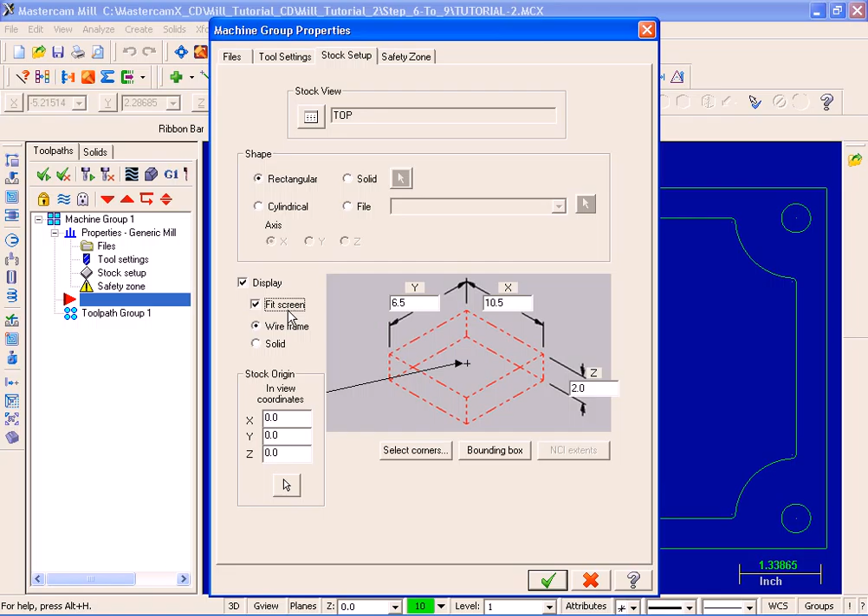Next, moving up to the top, I'm going to select the Tool Settings tab. Our feed calculation is going to be taken from Tool. If we move over to the right in the toolpath configuration area, I'm going to switch on assign tool numbers sequentially and also check mark warn of duplicate tool numbers.

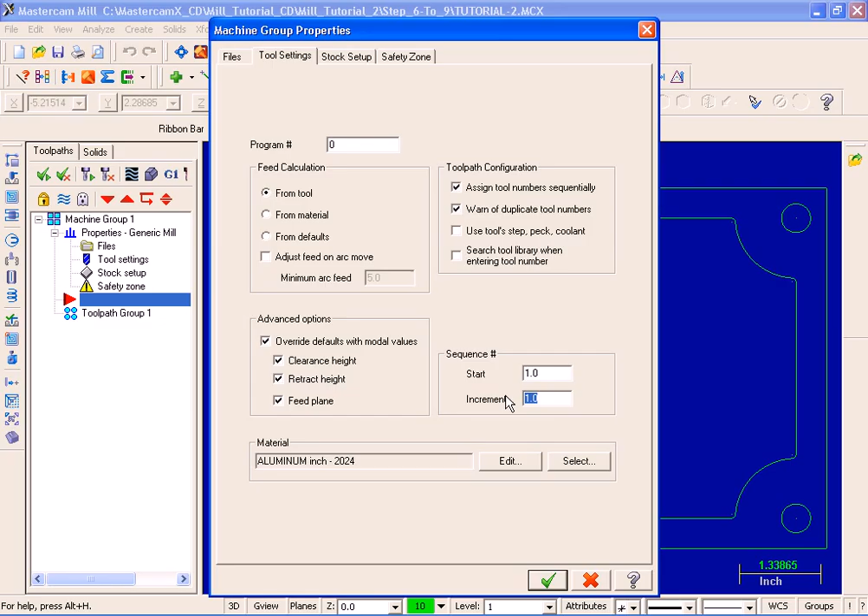Moving on down now into the advanced options section, I'm going to check override defaults with modal values and switch on clearance, retract and the feed plane. Moving over to the sequence number, I'm going to change the start to 1 and the increments to 1 also. Everything looks great here. I'm going to go down the bottom and hit the OK button.

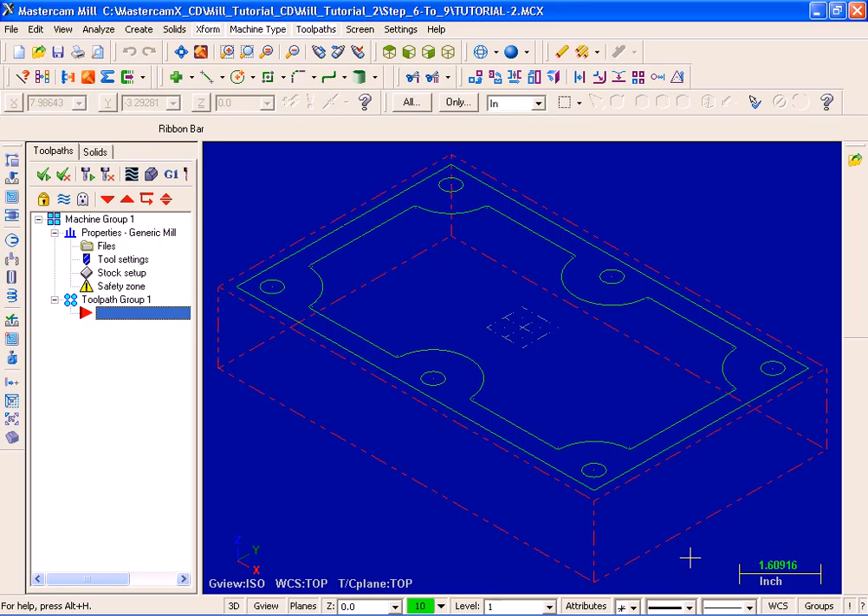Let's move on up and select the isometric view button, followed by screen fit. As you can see, the red dashed lines represent the stock we've just set up. Let's move on up to the top now, and I'm going to select top view and again screen fit.

For step 7 we're going to spot drill the 6 holes. I'm going to select tool paths and then drill toolpath.

Moving over into the drill point selection dialog box, I'm going to pick mask on arc. Now the prompt select arc to match, I'm going to pick this top left hand circle. As you can see, it selected it and the diameter here is 0.48438.

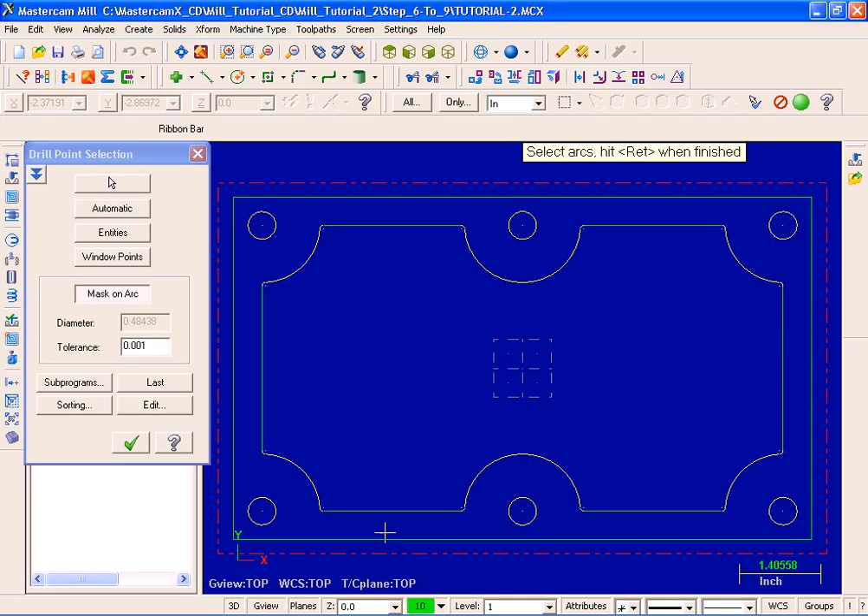Next I'm going to draw a window around the whole part, and it's selected the remaining 5 holes. I'm going to move up to the top right hand side of the screen and select End Selection, followed by OK.

Next we need to select a tool. I'm going to move down and hit the Select Library Tool button. And what I'd like to demonstrate now is how we can use the filter to filter out a specific tool with a given diameter.

First of all, in the Tool Types area, I'm going to select None to disable any previous tool selections, and then move on up now and select Spot Drill. Moving up into the tool diameter, you can see I have it set to equal, and it's at 0.75. So everything looks fine here. I'm going to pick the OK button to exit, and it's filtered out the appropriate spot drill.

I'm going to select this drill and then pick OK. As you can see, it's set to tool number 1, but for the length offset I'm going to change that to 1.

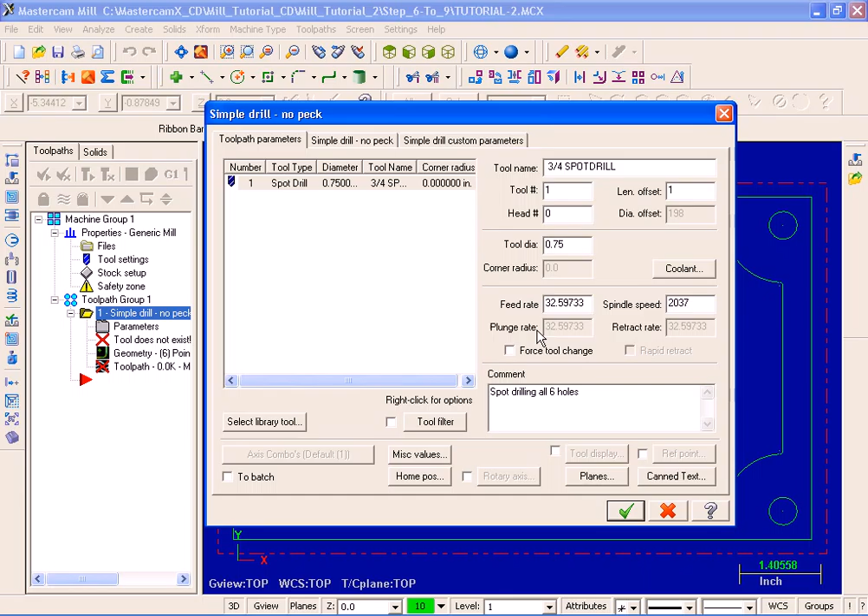Everything looks good here. What I'd like to do now is move over to simple drill, no peck. I'm going to turn on the clearance. As you can see, it's set to 2 inches and in absolute, so that's good. Moving on down, retract is absolute 0.1, that's great. Top of stock is 0 in absolute.

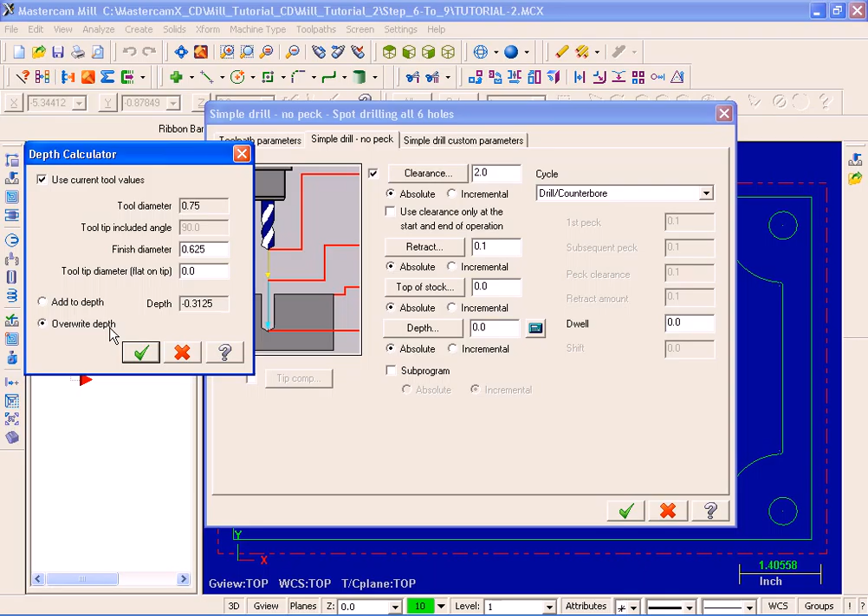Now, for the depth, we want to use the 0.75 diameter spot drill to chamfer the holes. So to calculate the depth, I'm going to select the calculator icon. Now for the finished diameter, what I'm going to do is change 0.75 to 0.625. I'm also going to move down and put a check mark against overwrite depth. I'm now going to select the OK button, and as you can see, it's input the correct depth for me.

Moving up to our cycle, we have it set at drill counterbore, so everything looks great. I'm now going to press the OK button.

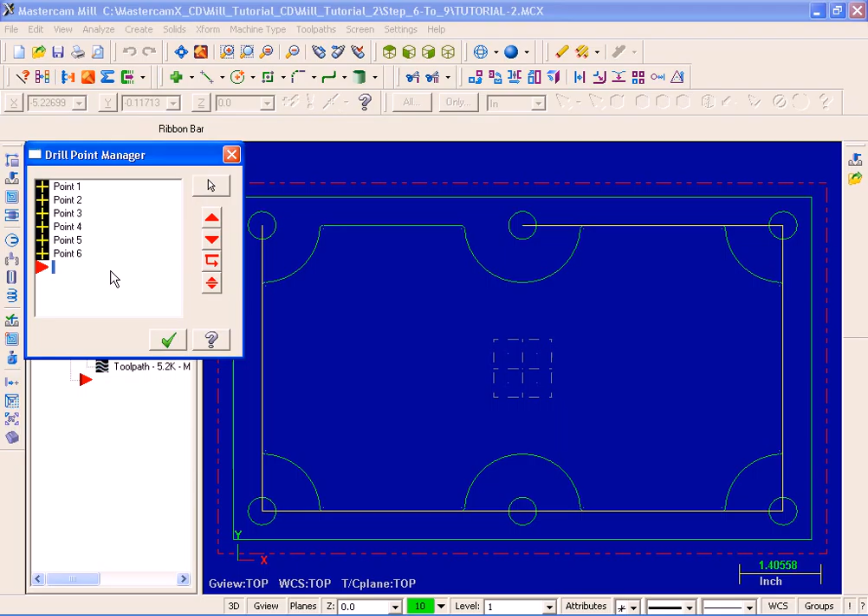Now, to change the order in which the holes are spot drilled, what I'm going to do is select the geometry. Next, when the drill point manager appears, I'm going to right mouse button and sort options.

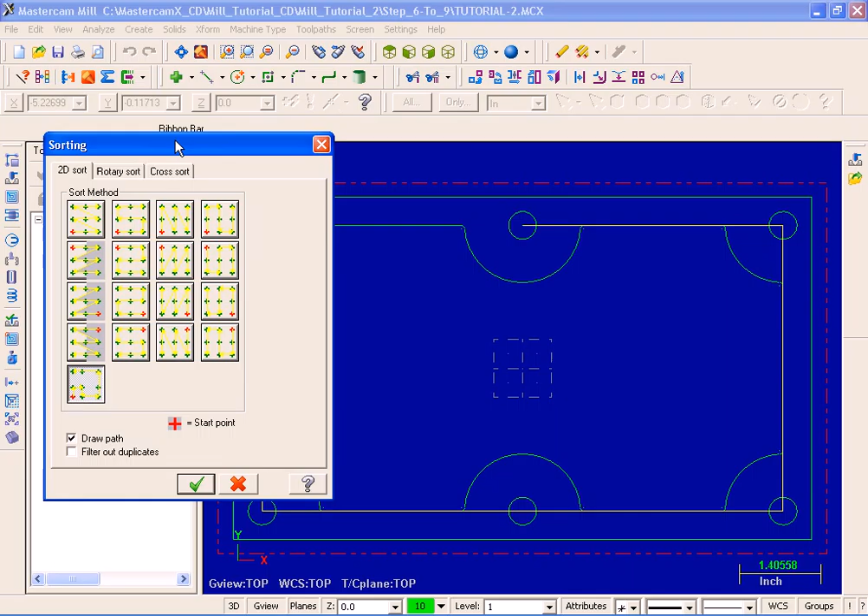Moving down to the bottom left corner, I'm going to select point to point, move this dialog box over, and pick OK. Now for the prompt, select sorting start point. I'm going to move over and select our top left hand hole. Everything's been sorted now, so I'm going to pick OK.

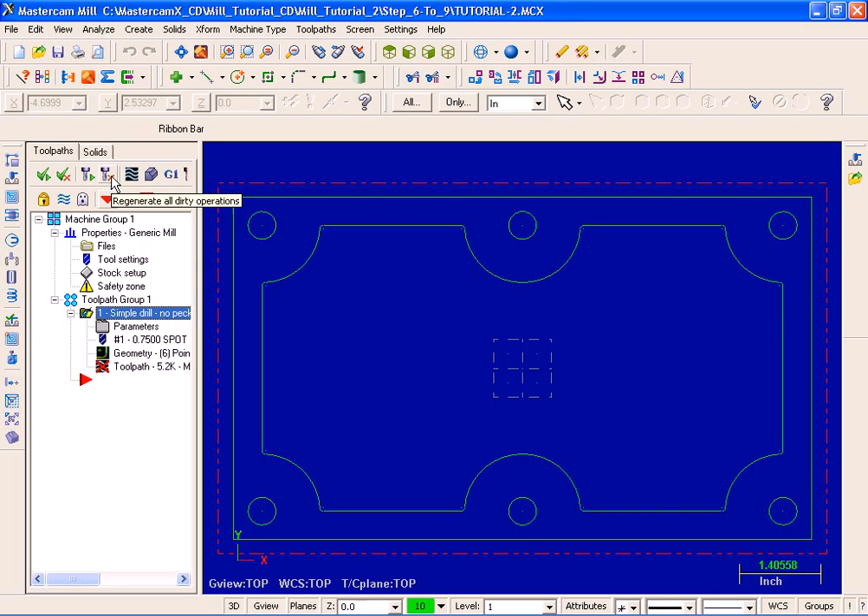Now, as you can see, over on the left hand side we've got a red cross. I'm going to move up and select Regen All Dirty Operations. Let's move on to step 8.

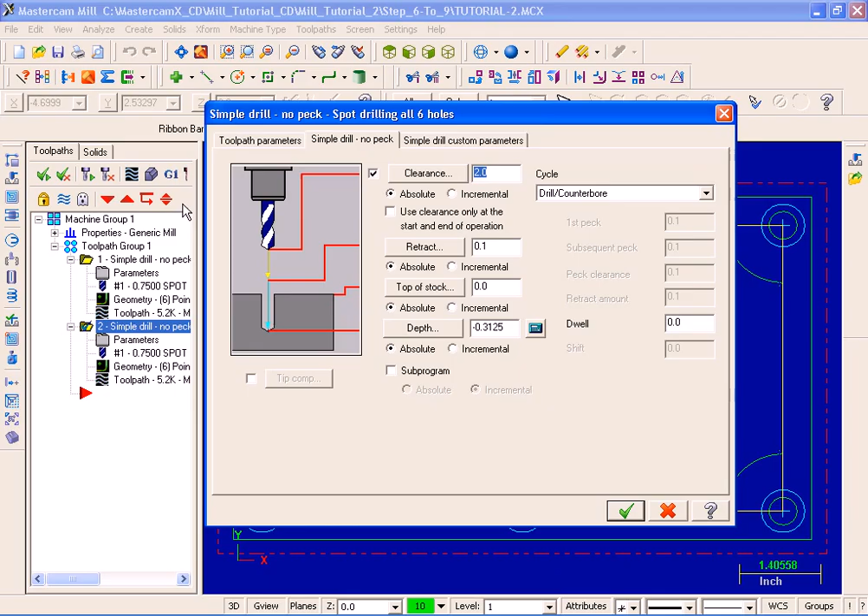We're going to drill the holes now. Over on the left in the toolpath manager, I'm going to right mouse click and pick copy. As you can see, I've only got one operation selected. I'll right click again and paste. So we have 2 operations, and at present they're both exactly the same.

For this second operation, I'm going to move into parameters and select the toolpath parameters page. Now we need to set up the appropriate drill. I'm going to pick the select library tool and pick the filter button. I'm going to select none and then move up and pick drill.

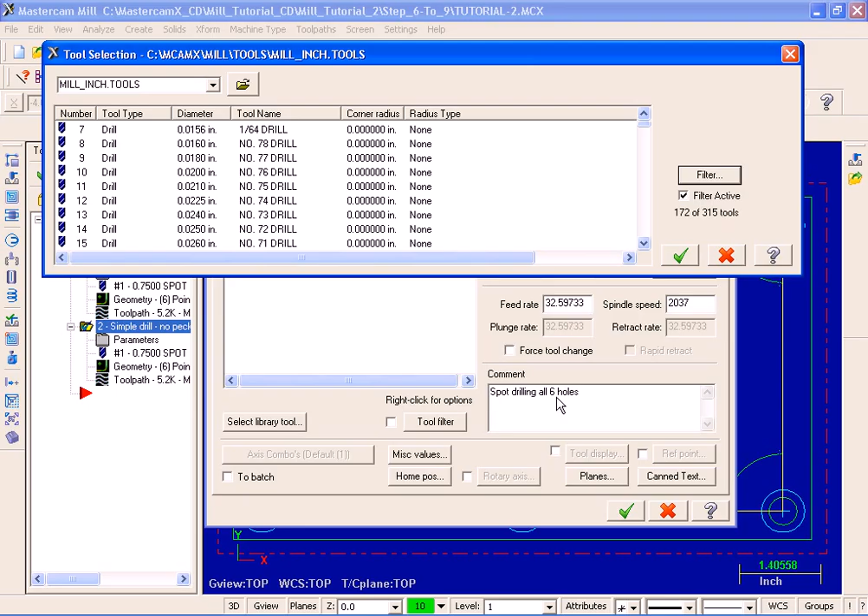For the tool diameter, I'm going to change that to ignore, then move down and pick OK. Let's scroll down and find our 31/64 diameter drill. There it is. I'm going to select it and then pick the OK button.

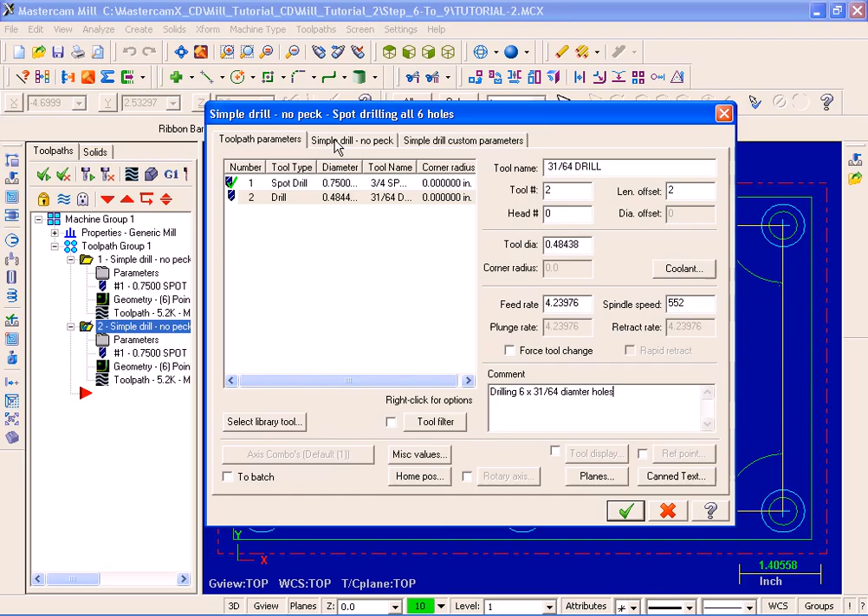First of all, we've got tool 2, and for the length offset I'm going to input 2. For the comment I'm going to type in drilling 6. So I've input my comment.

Everything looks fine here. Let's move over to simple drill, no peck. Clearance is still on, set at 2. Retract 0.1. Top of stock is 0. The depth, I'm going to change that to -1.4.

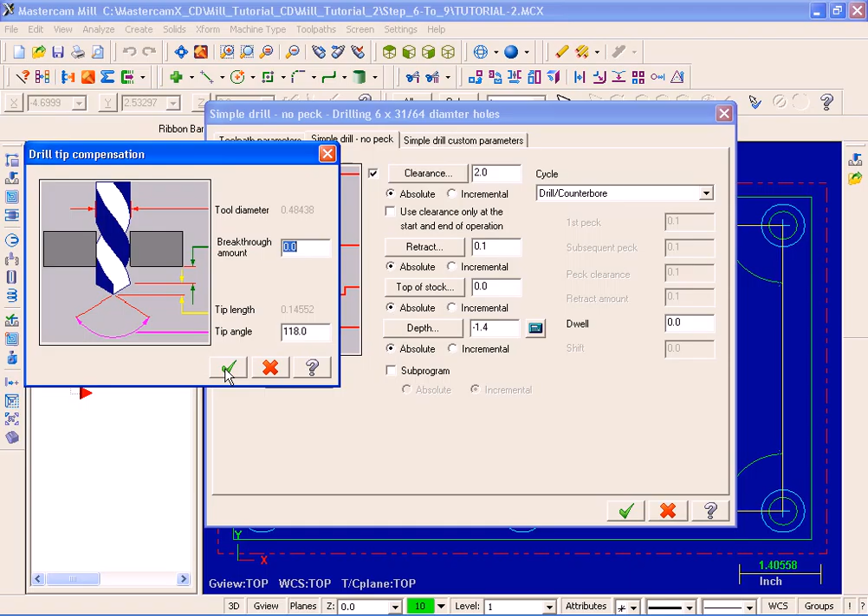I'm going to move down and switch on tip comp. Now I'm going to press the tip comp button. The breakthrough amount is set to 0.1. I'm just going to change it to 0 and pick OK.

Let's move up now to drill counterbore, and change this to peck drill. For the peck amount, I'm going to change that to 0.2. Everything looks great here, go down to the bottom and hit the OK button. As you can see, we've got a red mark. Let's go up top and do a regenerate all dirty operations. Everything looks great. Moving on to step 9.

We're going to tap the holes now. Over on the left in the toolpath manager you can see I've got the last operation with a check mark against it. I'm going to right click, copy, and right click again and pick paste.

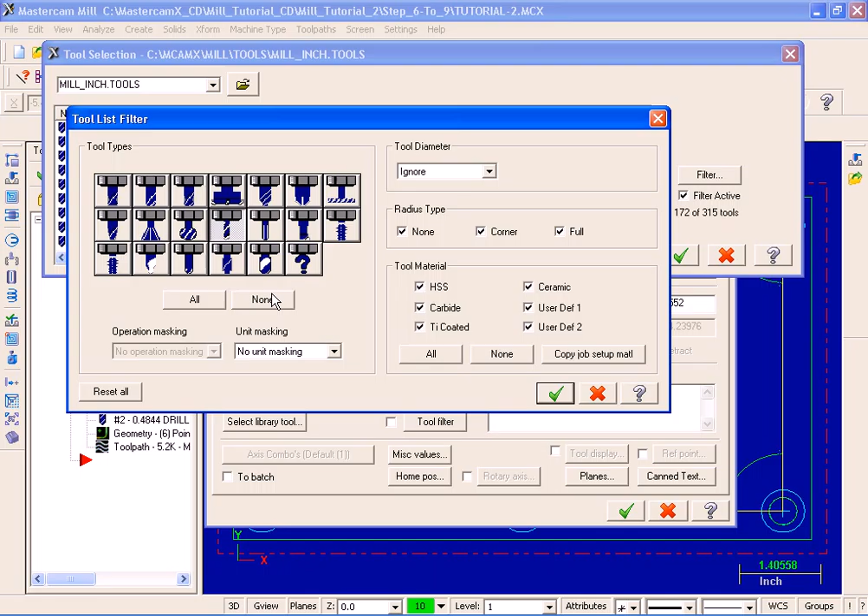Now for our third operation I'm going to go into parameters and move back to the toolpath parameters page. Now we need to go and select a 9/16 12 right hand tap. Let's pick select library tool, use our filter, pick none, and move up and select taps right hand.

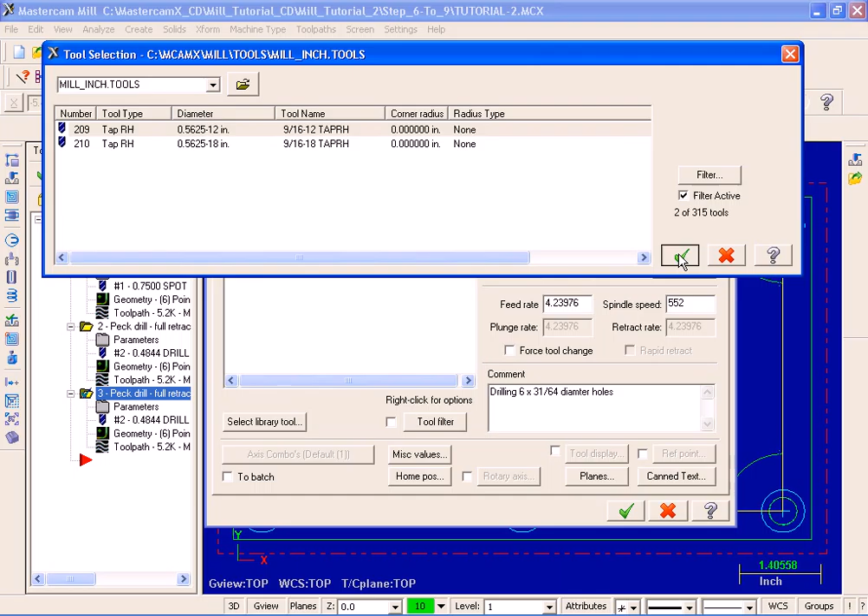Let's put in equal, and I'm going to type in 9/16, enter, and pick OK. So we have two selections here, 9/16 12 and 9/16 18. I'm going to pick the top one, the tool we want, and pick OK.

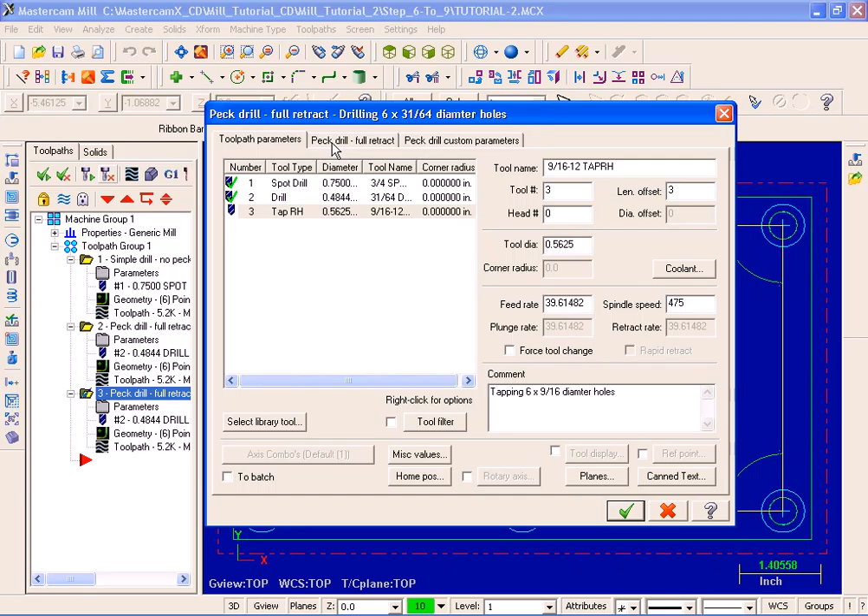Tool number 3, I'm going to change the offset to 3. Moving down to the comment, tapping 6, 9/16 diameter holes.

Everything looks good here. Let's move over to the next page, peck drill full retract. The first thing I'm going to do is change the cycle. Let's open up and we need to select tap. Clearance is fine, retract is good, top of stock 0 is good. I'm going to change the depth to -1 and also turn off the tip comp.

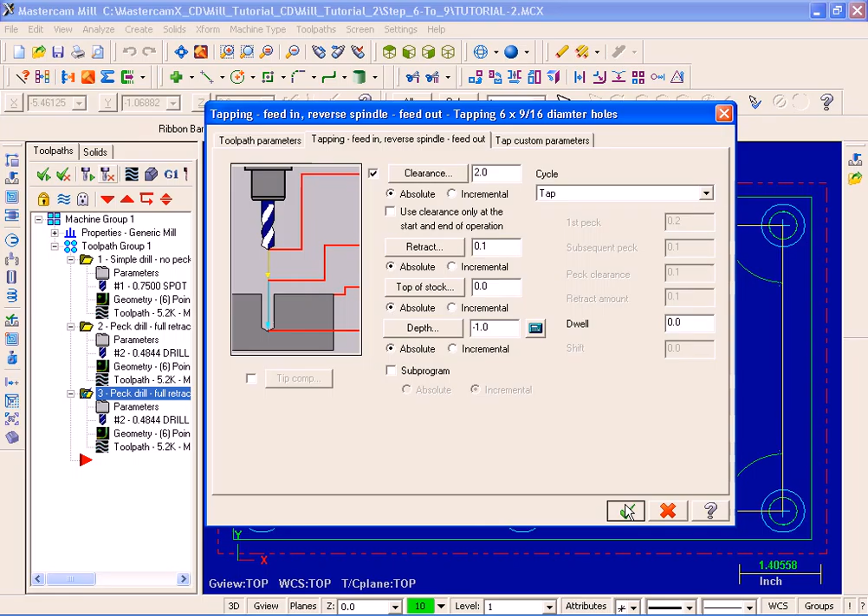Everything looks great here. Let's go down the bottom and hit the check mark. As you can see, I've got a red cross down here. Let's move up and do a regen.

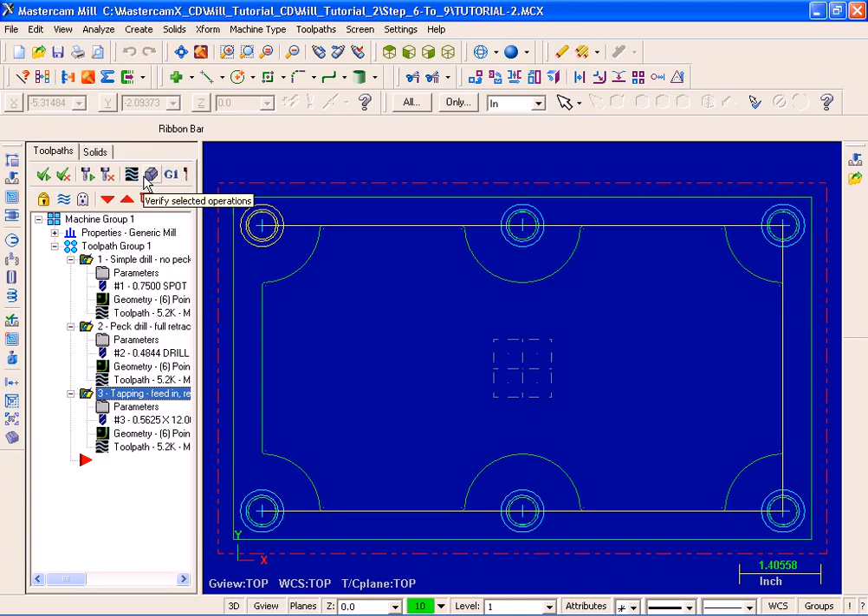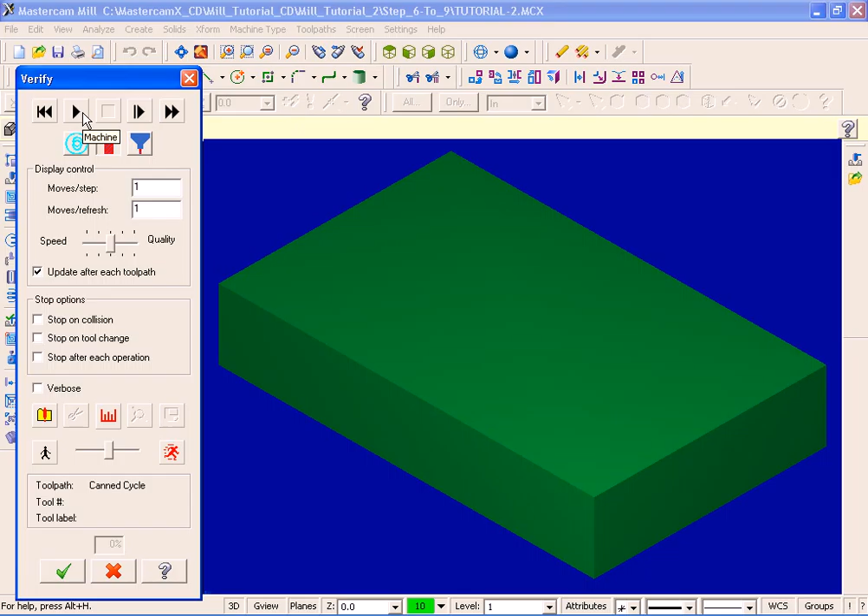Let's go and verify the tool motions we've created. I'm going to select all operations, then back up to the right, and we'll verify our 3 operations. I'm going to move up to the toolbar and get an isometric view. In the verify dialog box, I'm going to slow the speed down and hit the machine button, the play button.

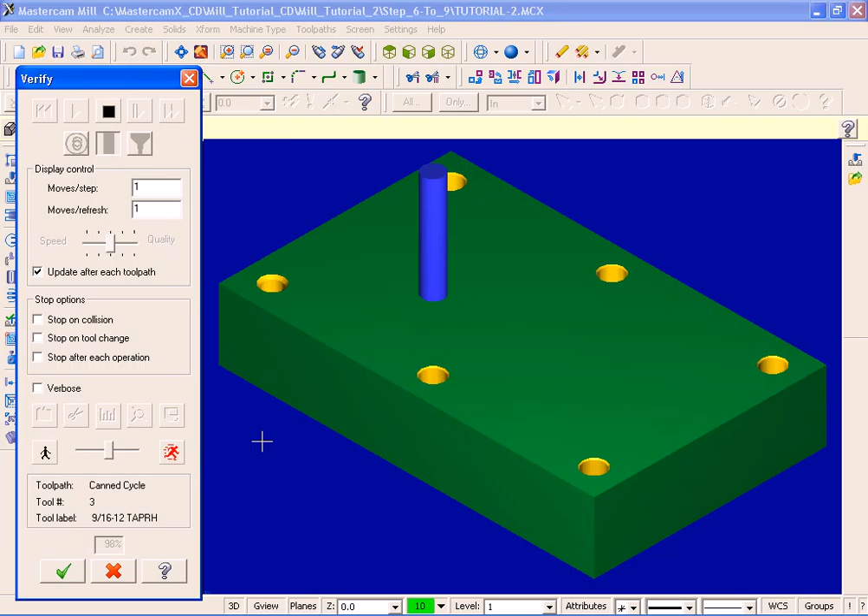Up first is our spot drill operation, followed by peck drilling, and finally our tapping. I'm going to pick OK, and that completes this video segment.